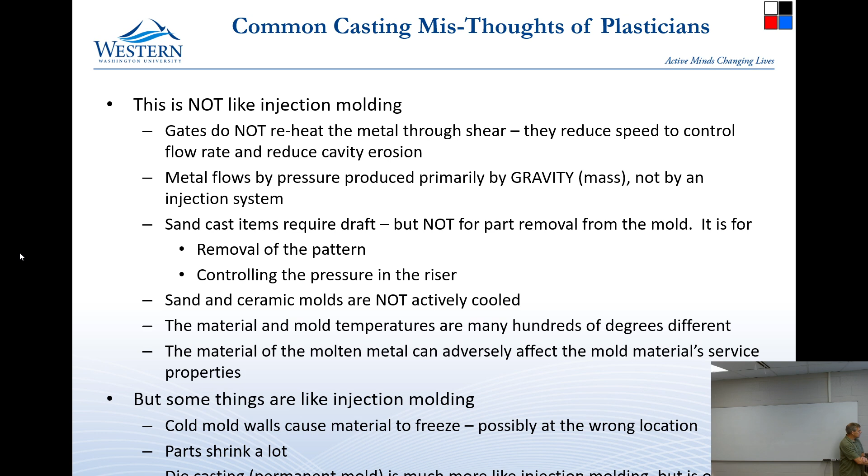The other major kind of expendable mold casting is investment casting, or lost wax casting. You start by making a wax version of whatever you want to make. Sometimes those are cast in a little mold. Sometimes, like on a sculpture, it's carved by hand, or there are other ways to get to the wax version.

You take those little wax parts and attach them to a sprue that is also made of wax, and you add runners in there. When you put this all together, it's called a tree. So this is all wax material.

You take it and dunk it in a ceramic slurry, then shower it with ceramic parts, doing this back and forth many times. Then you hang it upside down and heat it. This both cures the ceramic and melts all the wax out of the inside. Afterwards, while it's still hot, you pour the molten metal in, and that creates the parts. At the end, you put it on a machine that shakes it really hard, cracking all the plaster off the outside.

This is a lot like sand casting. It has the ability to do very high temperature materials, maybe not quite as high as sand casting, but almost. It gives a smoother surface on the materials, a better surface finish. Though last year we got a worse surface finish with this, but our investment casting was a little shoddy.

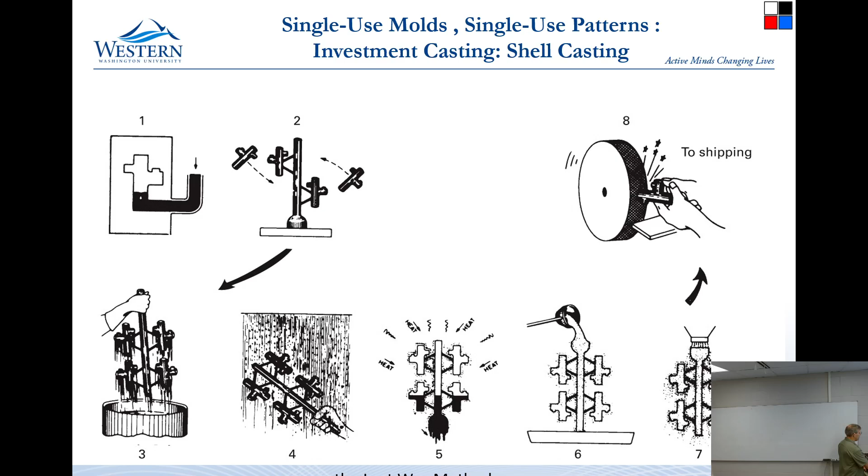This is a really cool method and a really good way to make things. It takes more processing than sand casting to get that smoother surface finish, but this does allow you to get a better finish on the part right off.

Yeah, we're going to skip that. No need to do that.

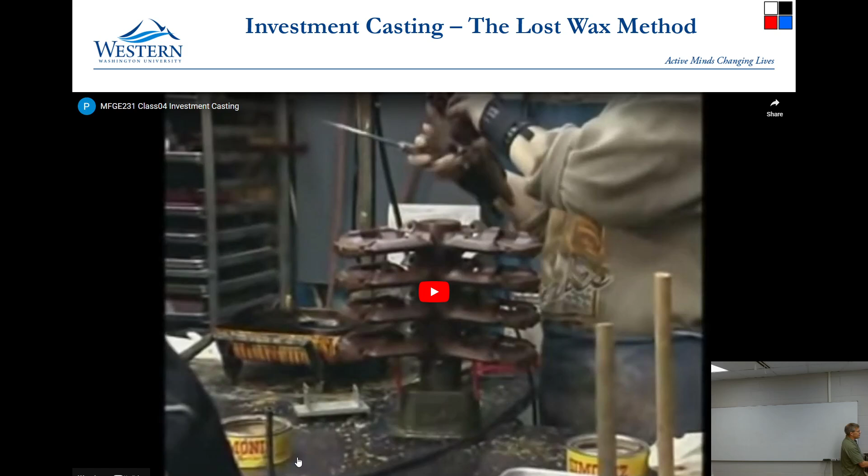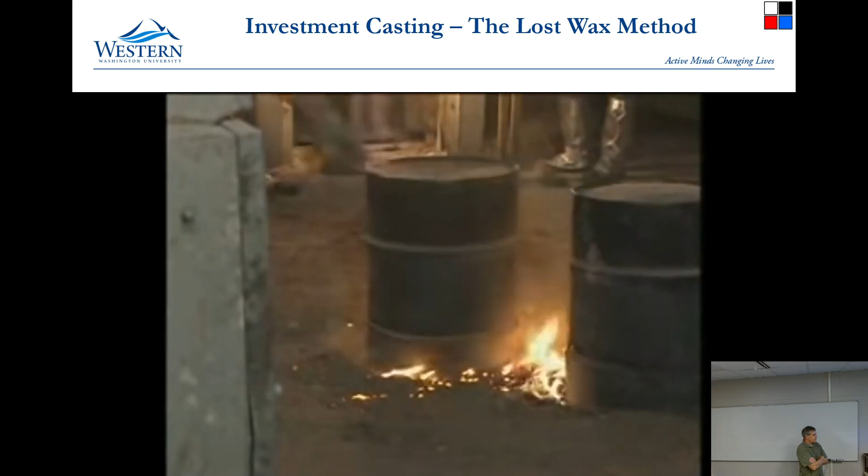So this is ceramic casting, and I think this is Miss Captain Obvious from the SME videos. Investment casting is a precision process using primarily ceramic shell molds. Investment casting is also known as the lost wax process, because wax, a principal pattern material, is consumed during the mold-making process. Consumable plastic patterns are also used.

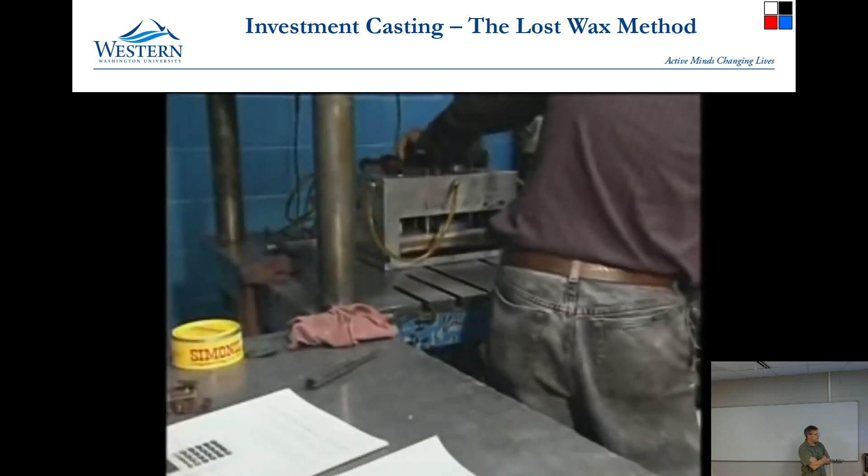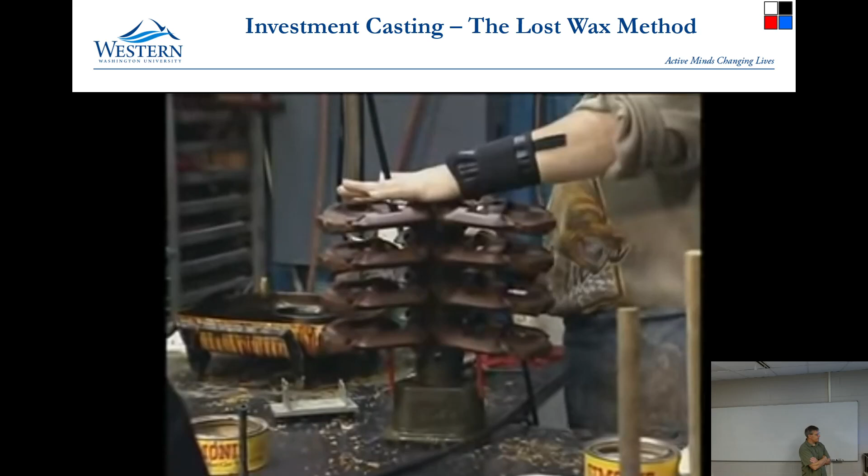Investment casting patterns are made by injection molding. These patterns are assembled onto a wax post connected to a pouring cup. This pattern assembly, called a tree, usually incorporates complex runner systems to assist metal flow in the investment casting process.

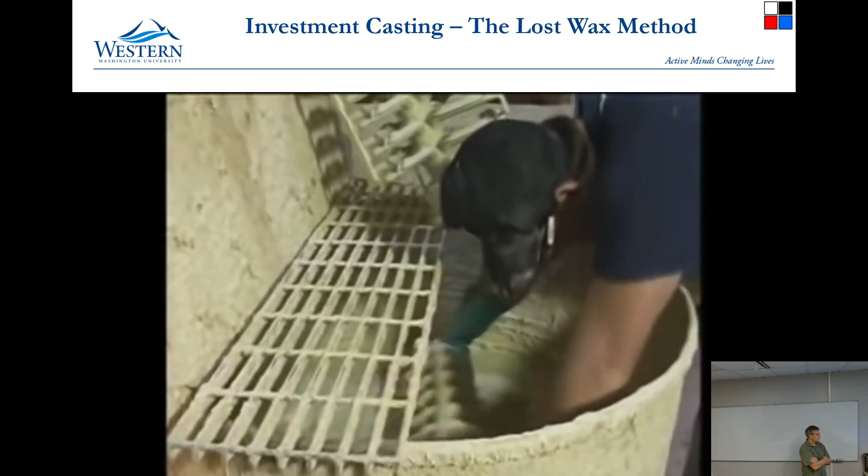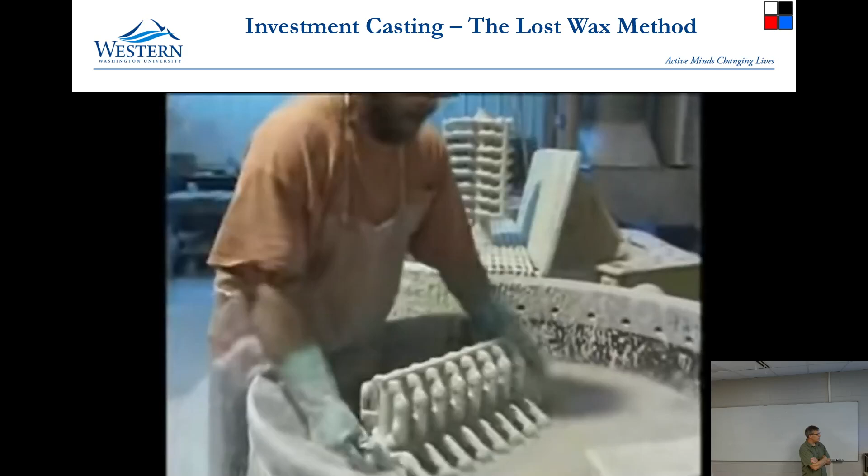The shell mold is produced by dipping the pattern assembly several times in slurry and allowing it to dry between dips. The first slurry mixture consists of fine particles for smoothness. Subsequent dips are mixed with coarse particles to quickly build up thickness and provide strength.

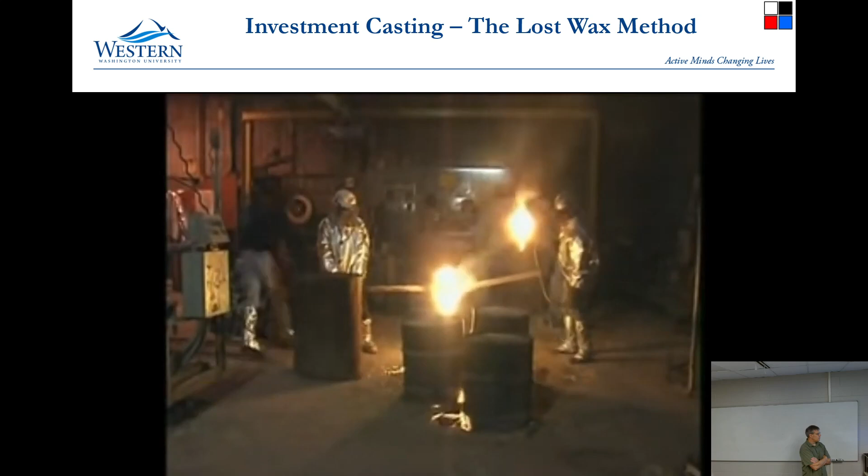The wax is removed from the mold by melt-out in a furnace or autoclave. Then the mold is fired to remove moisture, cure the ceramic, and preheat it for pouring. Both ferrous and non-ferrous metals can be investment cast. Once the metal has solidified, the mold is broken and the casting removed.

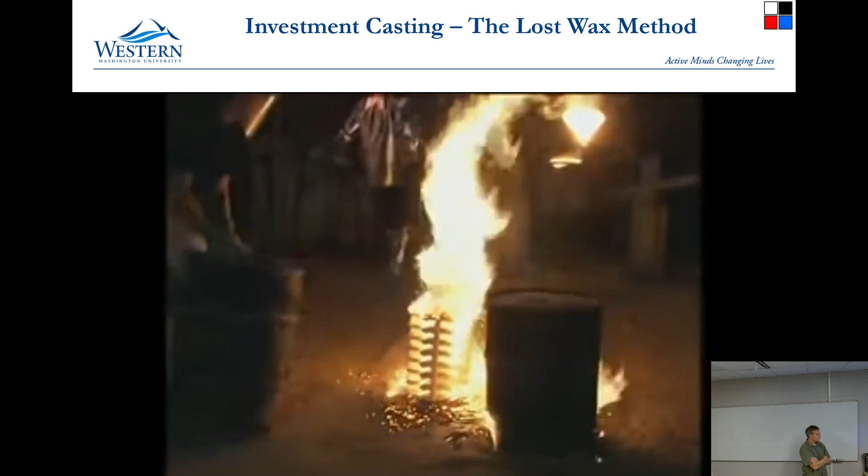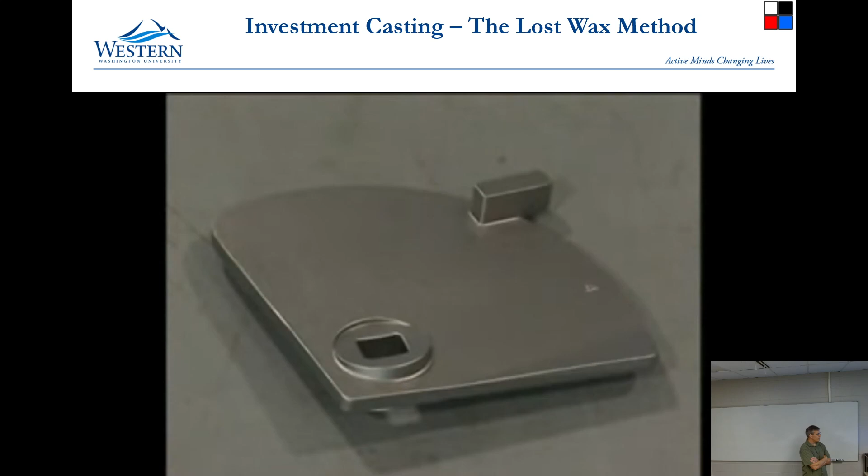The main advantage of investment casting is the complexity of shapes that can be cast to close tolerances, thin walls, and smooth finishes. Most investment cast parts weigh less than 4.5 kilograms. However, parts weighing over 100 kilograms are also made.

Captain Obvious kills me. We won't watch a lot of Captain Obvious videos, but he's so funny. Like, the difference between hot and cold risers is, as the name implies, the temperature of the riser. You do a pretty good impression. Thanks, that was 45 seconds of my life that I cannot get back.

All right, how would you decide whether to use sand casting or lost wax casting? Yep, desired surface finish and size of the part being made. Okay, size of the part, desired surface finish. Complexity? Which is better for complexity?

Lost wax. It's interesting, it sort of depends, and the reason is because it's based on the pattern that you can build. If you can make a really good complex wax pattern, then you can make a really good complex part with lost wax. But sometimes it's easier to make the pattern in the sand configuration. It's not always a one-to-one correlation. Yeah, curious.

Volume is another consideration. With lost wax casting, you make a tree of many small parts at once. Sand casting lets you spread parts across the parting line between the cope and the drag, but the big difference is you can't stack them vertically in sand casting because there's no way to get the pattern out.

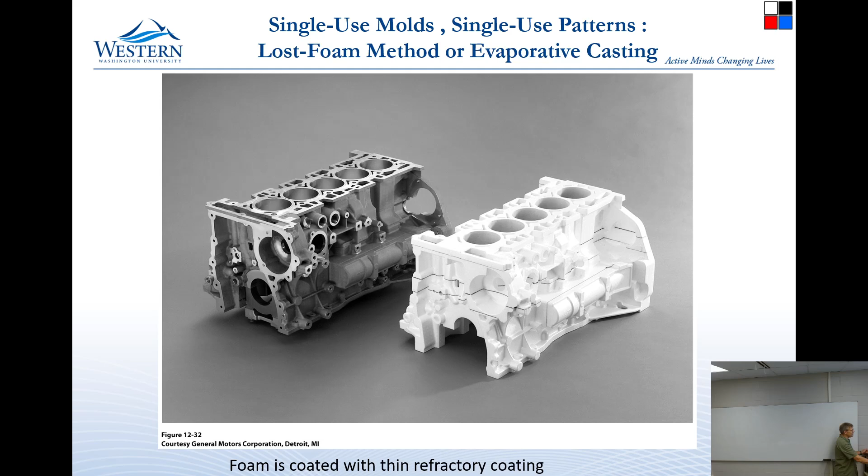Like I showed the other day, it's pretty cool—on a part made by this process you can see all the little marks left from the polystyrene. I can pass this around. I don't know what those marks are called—bubbles, nodules, grains, something like that.

All right, so we're not going to get into that now. We'll talk on Tuesday about how you know if a part is cast, and work on that then. So I guess we're finished for the day.